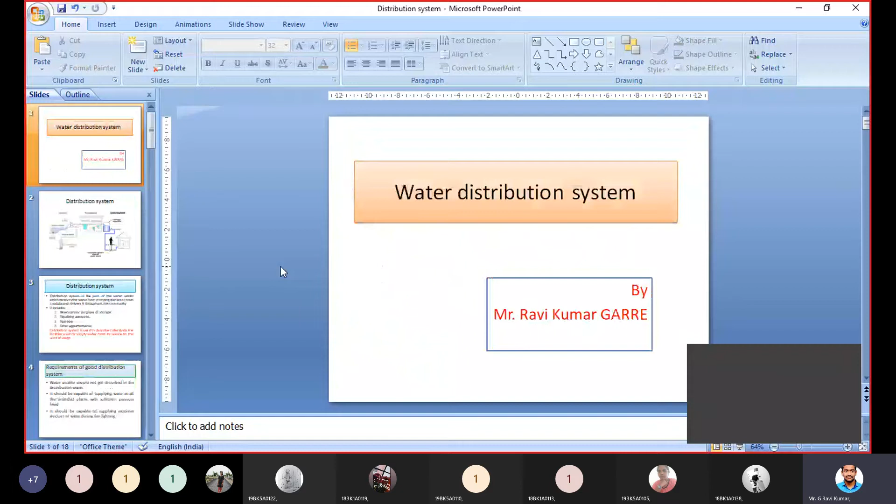In the previous class we were discussing about water distribution system, and we discussed different requirements of a good distribution system.

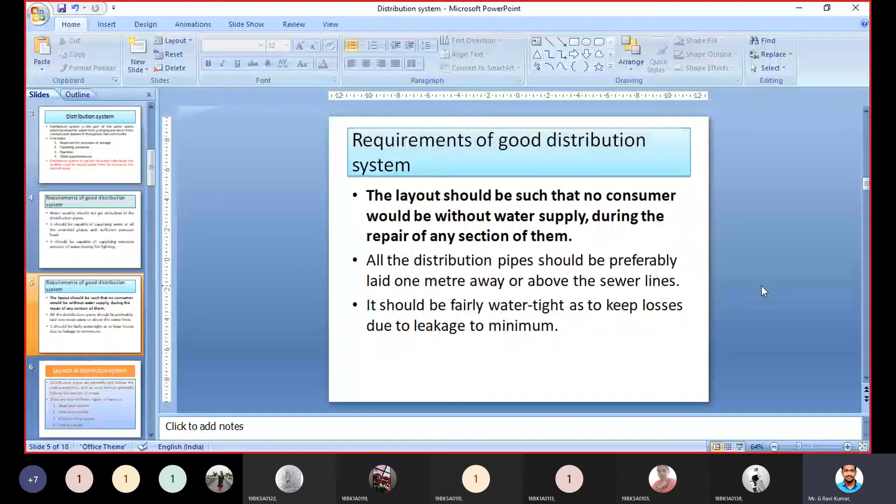if you take an area or a colony or a city or whatever it may be, the locality or the community, in that we have to lay the water distribution system like this.

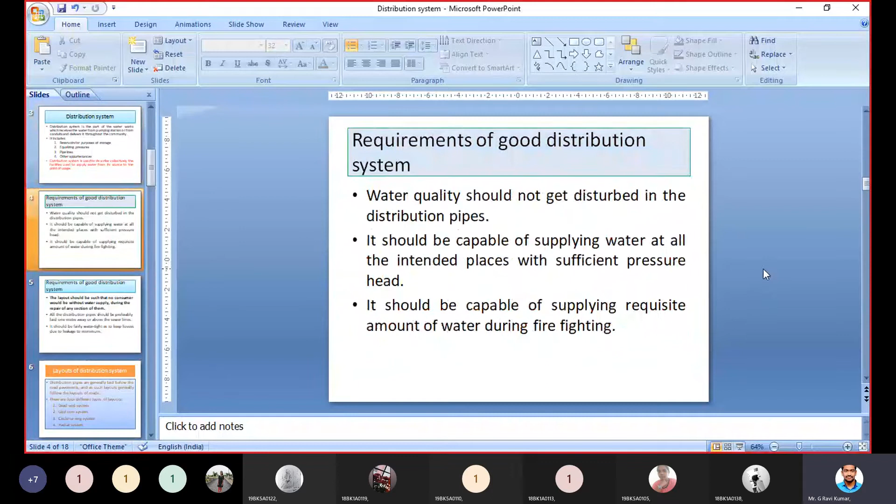One more thing we have to remember is that if we supply water through pipelines, then only it will be called a water distribution system. If we supply water through tankers, trains, or some other vehicles, it will never be called a water distribution system.

One more thing we can remember is that mostly if you take a colony, within that colony a number of streets will be there, a number of apartments will be there, and small gullies will be there. But how to have a layout of the pipelines,

that is the most important thing. If you take a colony, within that colony one main road will be there, and from that main road some streets will be split up, meaning some branch roads will be split up.

Within that, some small gullies and small roads or routes will be there, and different apartments, different houses, different offices, different types of commercial elements like schools, shops, hospitals will be there. Everywhere different zones will be there, different parks, gardens.

Everything will be there, so to each and everything, to each and everywhere, we have to lay the pipeline, and through that pipeline we have to supply the water. That is the important thing, how to lay the pipeline, that's the most important thing.

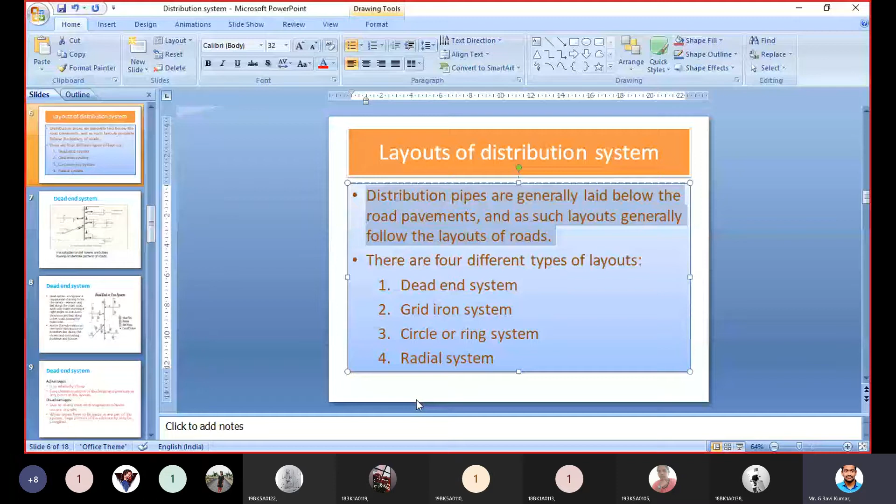The next thing is that there are 4 different types of layouts, depending upon the type of colony. If the locality is well planned and well designed and constructed, then the circle system or grid iron system will be good. But if the colony grew without planning, based on migration of people to that location, then the layout we provide will be called the dead end system. I have already shown the layouts of these different systems yesterday.

This is the most important question. There are 4 different types of layouts for water distribution system. The first one is the dead end system, next is the grid iron system, third is the circle system or ring system, and fourth is the radial system. These are the 4 types of layouts of water distribution system.

First, the dead end system. In this system, one main pipeline will be there - in any locality or colony, there will be one main road. So just below the main road we can lay a main pipeline, and different streets will be there. To each and every street we can have a branch pipeline. You can see the main pipeline is there, and different pipelines have been split up or diverged from the main pipeline.

You may call them streets or gullies, with different ends. From this main pipeline to each and every street and end of the colony, we can lay pipelines just under the roads and supply water. This kind of system is called the dead end system, and another name for it is the tree system.

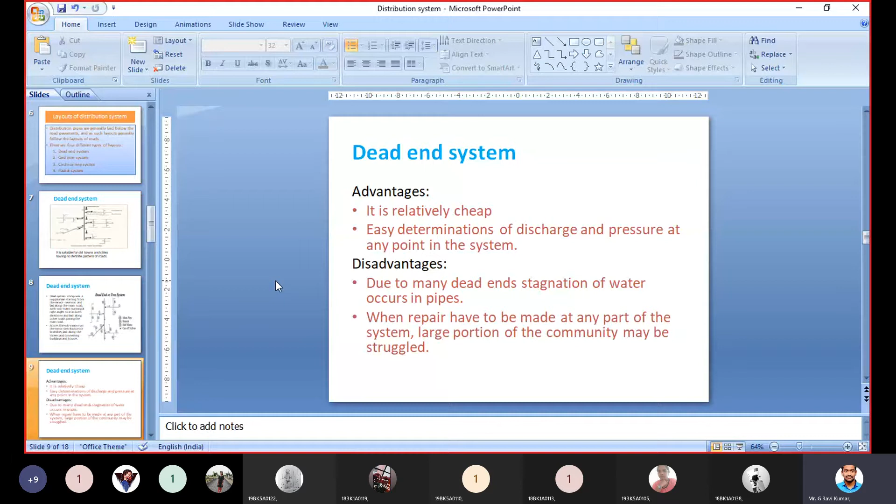Grid iron system means - you can see here, in dead end system, every branch pipe will start from the main pipeline, and at the end of the colony, or at some point, it should be ended.

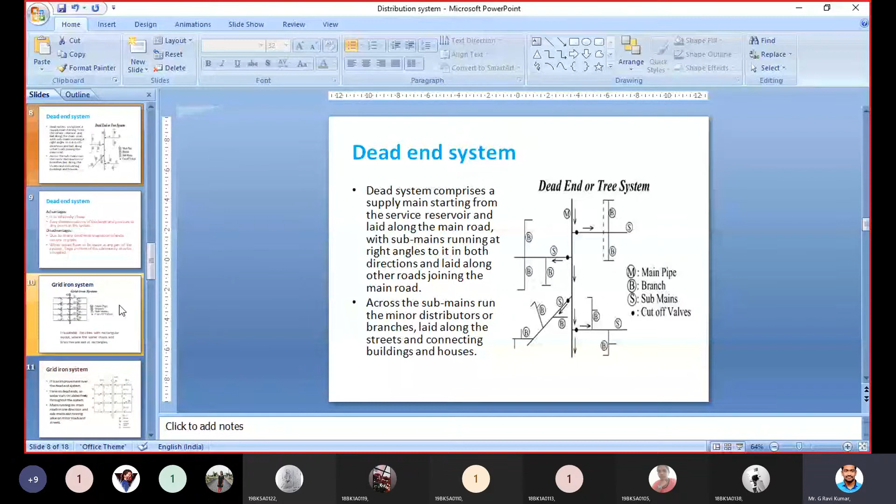But coming to grid iron system, in this system, the main pipeline will be there, and from the main pipeline the branch pipes will be started. But at the end of the branch pipeline, or at the end of the colony, the branch pipe should not end.

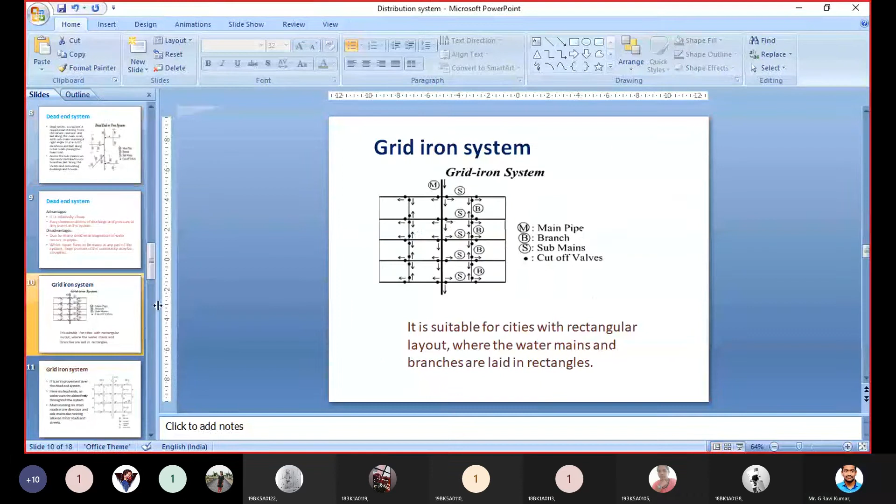It is suitable for cities or colonies or localities with rectangular layout, where the water mains and branches are laid in rectangles. In that case it is suitable. But even for other locations also, if it is possible, we can make it like that. So then this type of system will be called the grid iron system.

You can see here, main pipe is there, and branch pipes are there, and different valves are there. Every end of the branch pipe is connected to the end of its nearby branch pipeline. So in this case it is easy - if at any one particular point a repair operation is taking place.

In the previous case, it means in the dead end system, we can't supply water to either side of the point where repair is taking place. But in this system, if at any one particular point repair is taking place, for the remaining parts of the colony or remaining parts of the city, we can supply water from another direction.

If at the center or at the middle of the main pipeline some repair is taking place, then here we can supply water from the branch pipeline. From the other end of the branch pipeline, we can supply water to the remaining portion of the colony or remaining part of the city. So this is the advantage of the grid iron system.

It is an improvement over the dead end system. Here there are no dead ends, so water can circulate freely throughout the system. There are no ends, so water cannot be ended at a particular point. It can freely flow throughout the system, from one point to another point, and from one end to another end - we can allow water to flow.

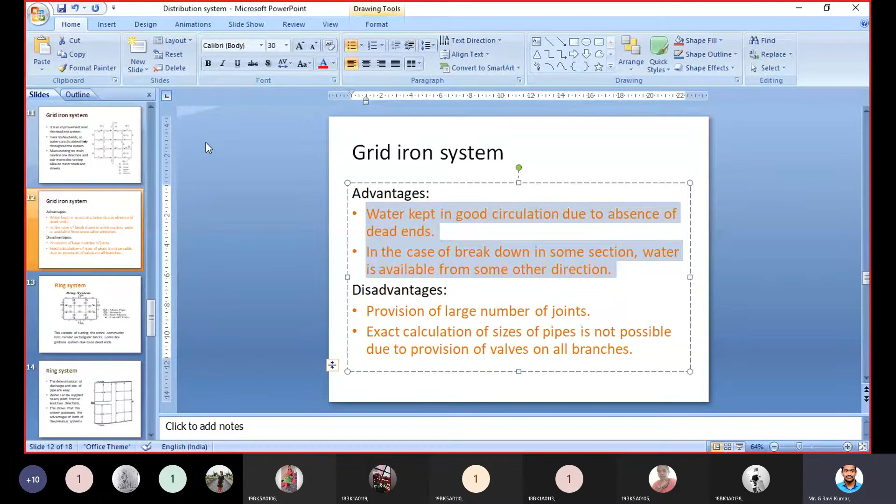It means exact sizes of the connecting pipes or branch pipes may not always be available. Here you can see ends of the branch pipes, so branch pipe sizes may vary. And the connecting pipe for the two ends of the branch pipe should be the same size. Otherwise, if its size is varying, the size of the connecting pipe may also vary.

So then what will happen? The water can't flow freely, and there is also a chance of obstruction for the flow of water. So the pressure head may fall, and the freeboard may not be available. The pressure within the fluid may fall, and the freeboard also may not be sufficient, causing obstruction for the flow of water. So that is the disadvantage.

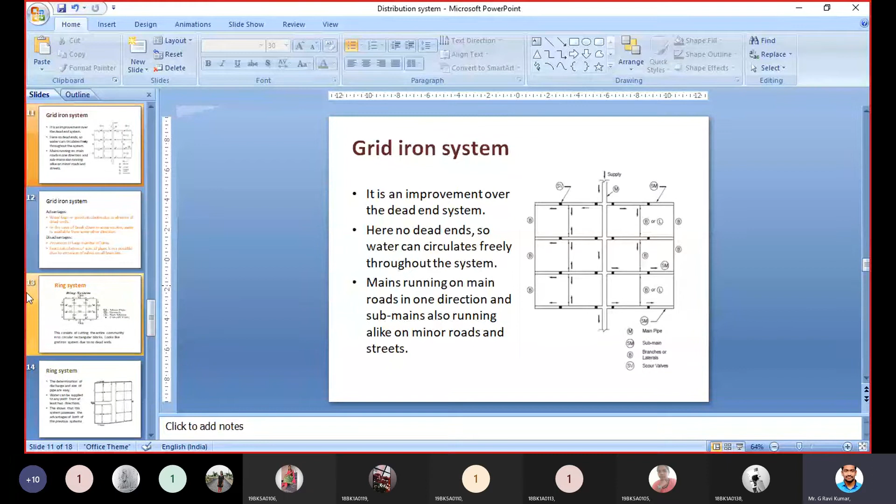Anyhow, compared to the dead end system, the gridiron system is advantageous. And the next one is the ring system.

This consists of cutting the entire community into circular or rectangular blocks. It looks like a gridiron system due to no dead ends, but it is not a gridiron system. It will be called a ring system, or a circular system. The main pipeline will not enter into the colony or the city; it will be outside of and around the colony. The branch pipes will be diverged from the main pipeline at different places, wherever the streets or roads are.

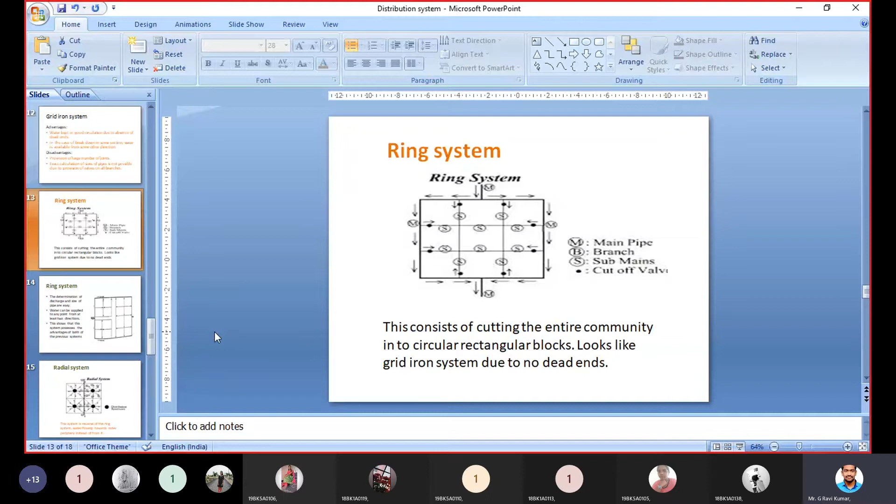There will be only one reservoir, only one water tank in case of the remaining other systems. But coming to the radial system, here the entire colony or entire area will be divided into a number of zones.

In this radial system, the entire colony or location is divided into a number of zones, and at the center of each zone an overhead tank or reservoir will be constructed. From that reservoir, pipelines are laid in all directions, so we can distribute water to each and every house. This type of system is called the radial system.

The system is reverse of the ring system, with water flowing towards the outer periphery instead of from it. In case of the ring system, from the outer periphery, it means from outside of the colony or city, the water flows inside.

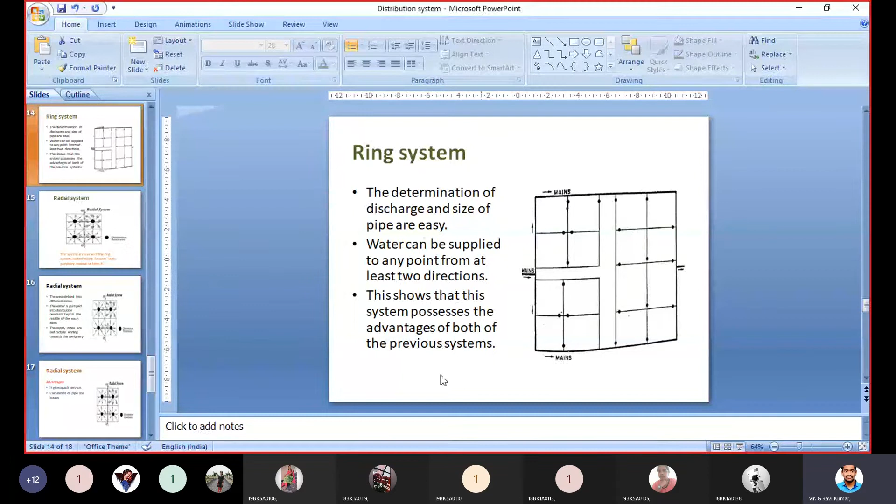But coming to the radial system, from the center point of the zone, the water flows to the end of the colony, to the end of the city. It means the system is reverse of the ring system, the water flowing towards outer periphery instead of from it.

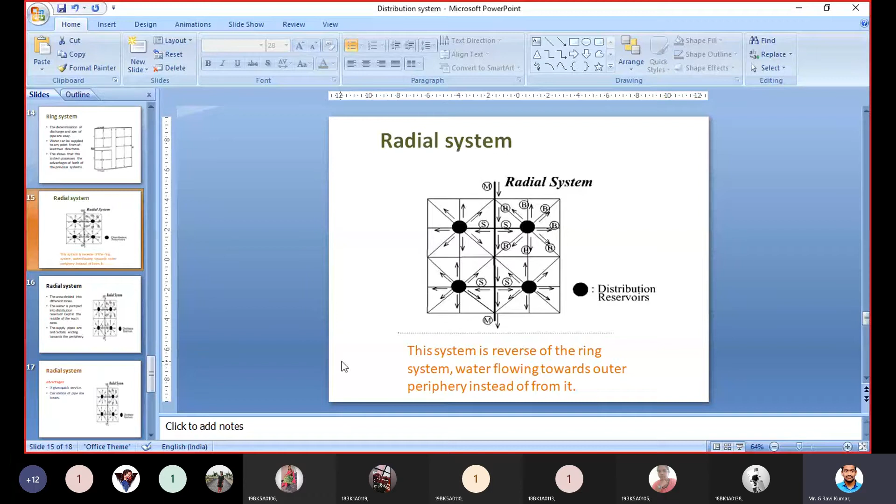This system is called the radial system. The area is divided into different zones in case of the radial system, and water is pumped into the distribution reservoir kept in the middle of each zone. Then from that reservoir, the pipelines will be laid, the supply pipes are laid radially ending towards the periphery.

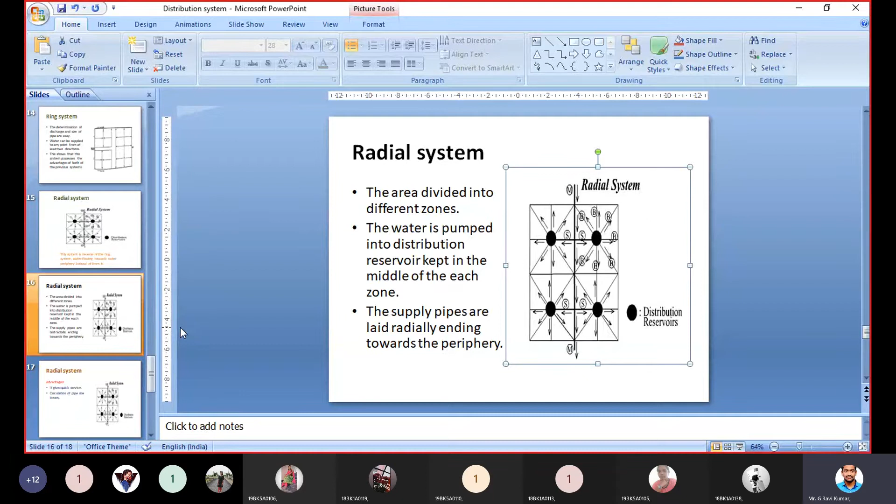The radial system has many advantages: quickly we can supply water to the public, and calculation of pipe size is also much easier here.

So these are the different types of water distribution systems: dead end system, gridiron system, circular system or ring system, and radial system. I think it is clear for you. If you have any doubts, you can ask me, guys.

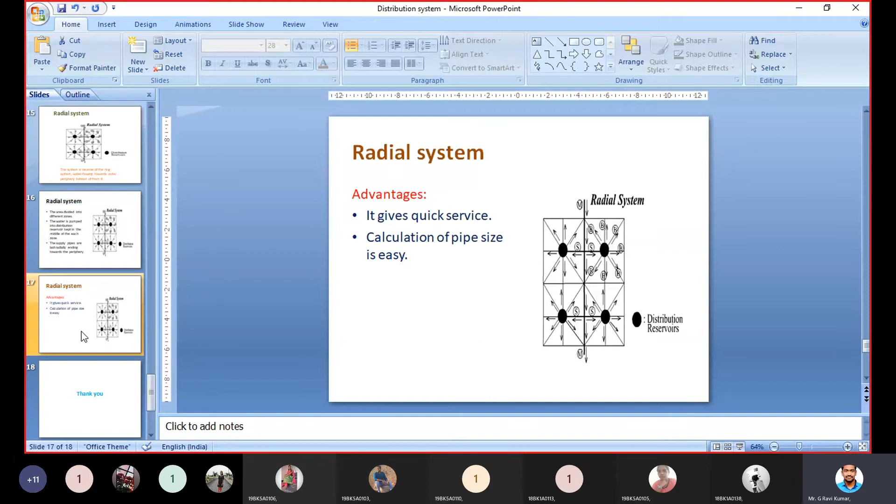Tell me, is it clear now for you? All the methods of water distribution system: dead end system, gridiron system, circle system or ring system, and radial system. Tell me if you have any doubts, you can tell me.

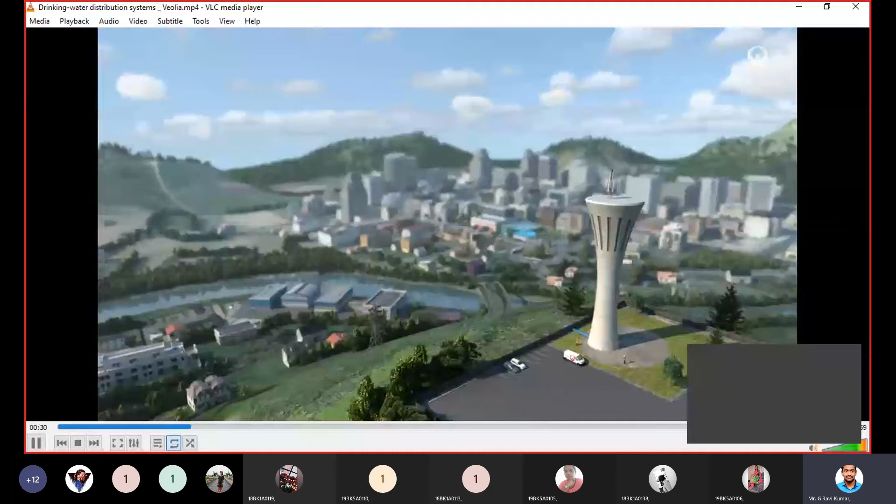Improving access to resources while preserving and replenishing those resources is what we do at Veolia.

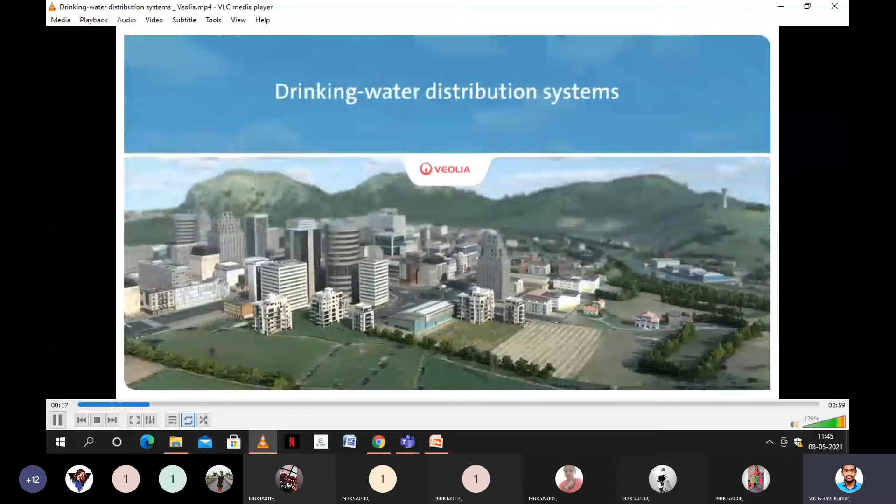Each day, our distribution systems deliver drinking water from treatment plants to our customers' taps. These systems are designed to provide an uninterrupted supply of drinking water on demand, compliant with regulations, in line with customer expectations, and with minimal environmental impact. Here's how and why at a glance.

The system is managed in small zones, which makes it easier to diagnose problems, do maintenance work, and accurately measure water distribution and consumption volumes. This is how we identify water losses. Leaks are found thanks to acoustic detection techniques or utilization of a tracer gas.

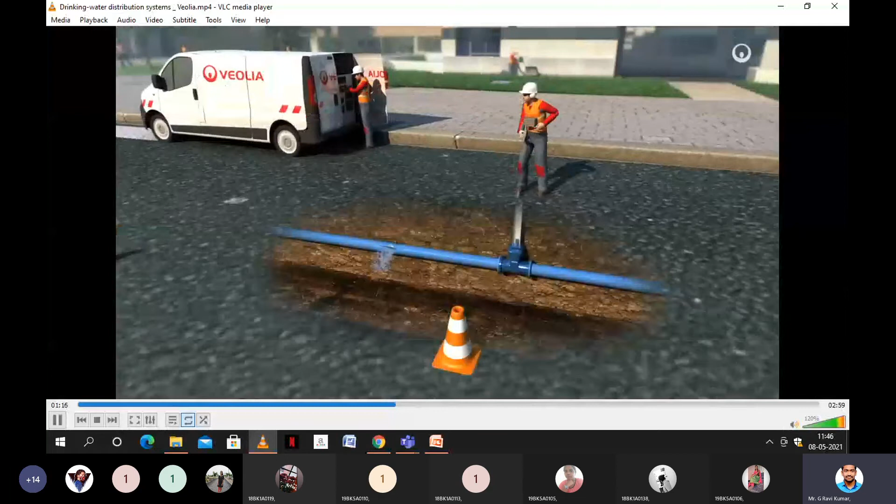At the base of buildings, pumping stations boost the water pressure so that it reaches every floor. We sample and analyze water throughout the network on a daily basis, making water one of the most closely monitored products made for human consumption.

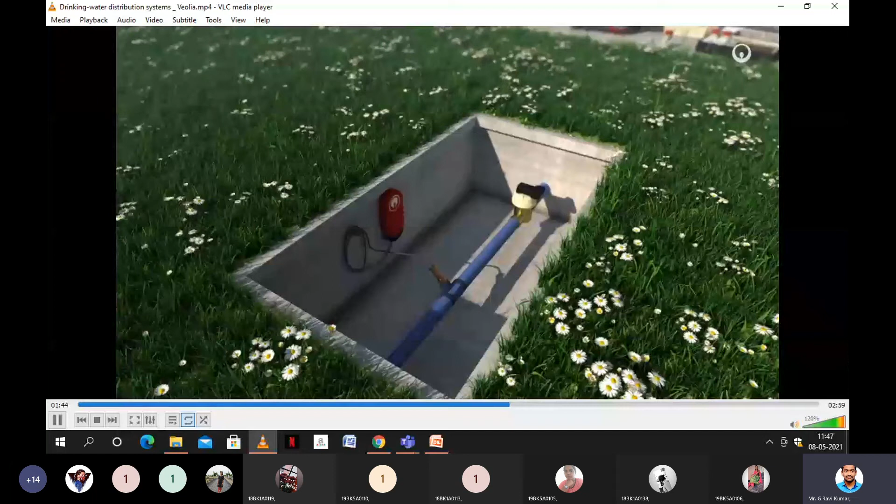Measuring instruments, sensors and probes are installed at key locations throughout the system. Meters measure water consumption at each household. In the network, other meters and instruments provide real-time readings on the flow rate, pressure, vibration levels, and water quality, and detect any leaks or changes in quality as soon as they occur.

These instruments transmit data via communication systems. This is what makes drinking water systems smart.

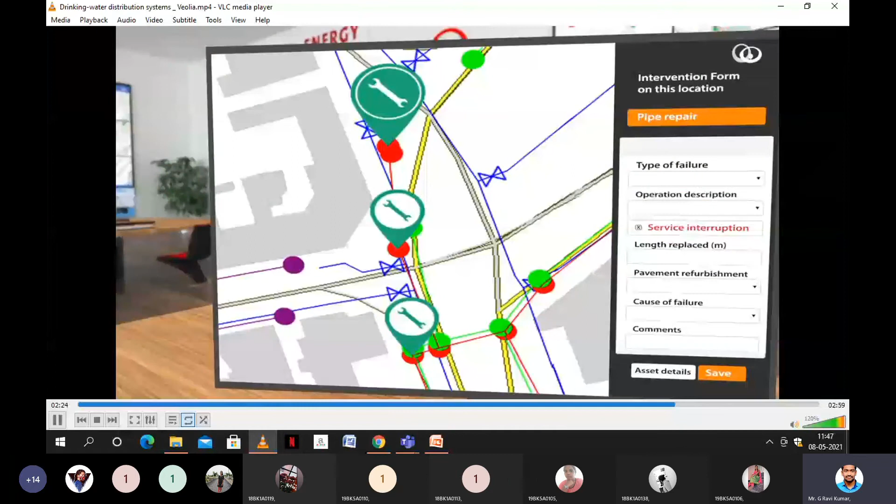All the data converges at a centralized control center. These control centers combine and analyze the data to provide insight about operations or events. This way, analysts have a global view of the network in real time. This is how they can monitor water quality, improve the operation and maintenance of the system, and respond rapidly and transparently, keeping authorities and consumers in the loop.

By ensuring a continuous supply of water while constantly optimizing our network's performance, our solutions are a long-term guarantee of operational efficiency for cities and for customers, the assurance of high-quality yet affordable water.

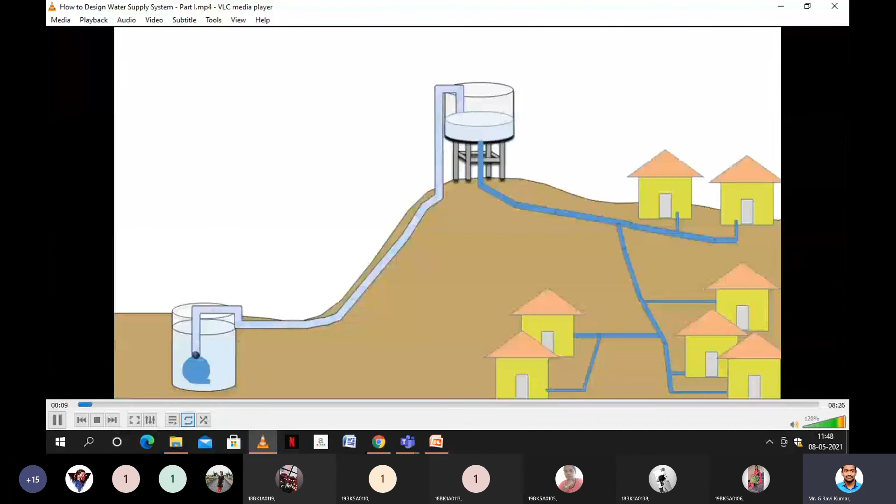In previous video, we learned about water supply system, and in this video, we are going to design that water supply system. So let's get started.

So in last video, we learned about 4 components of water supply system, which are shown here. The first one is source, second one is pumping machinery, third one is storage tank, and the fourth one distribution network. Later on, I told other 5th component, which was rising main.

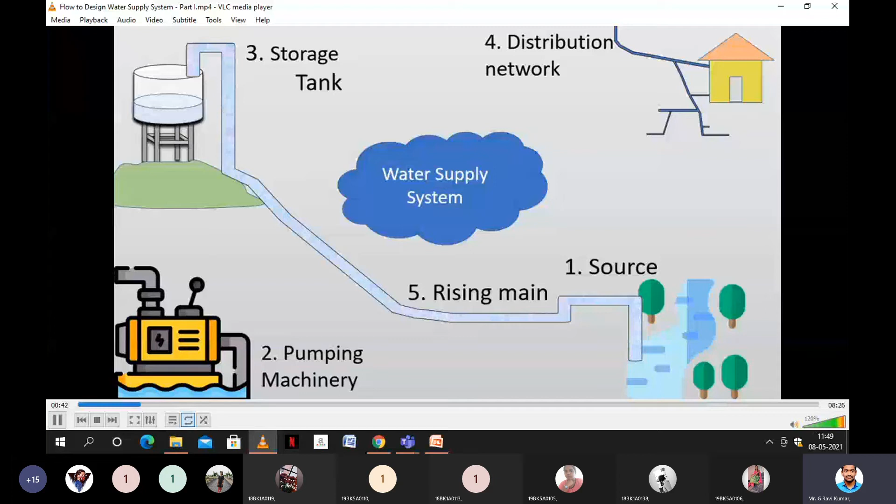We will learn about designing of these components one by one, and in next video, we will cover rising main and distribution network. But before that, we need to find out one parameter, which is most important parameter in designing of water supply system, and it is demand.

So what is demand and how to find that demand? Let's take previous village example. In that, there were some houses. Villagers needed water, and that village population of this year we don't have.

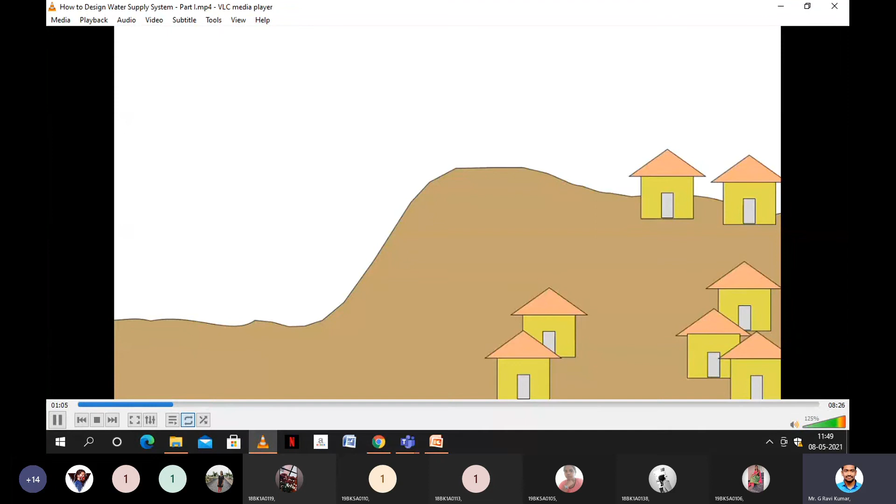To find out that, we will need previous year's census population. We can get previous year's population from census website. Let's say for the year 1991, 2001 and 2011, population of village were 1000, 2000 and 2500 respectively.

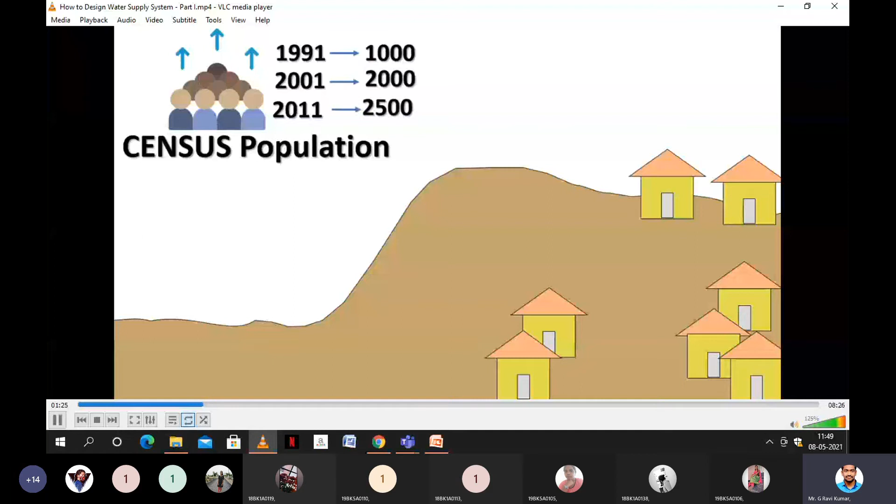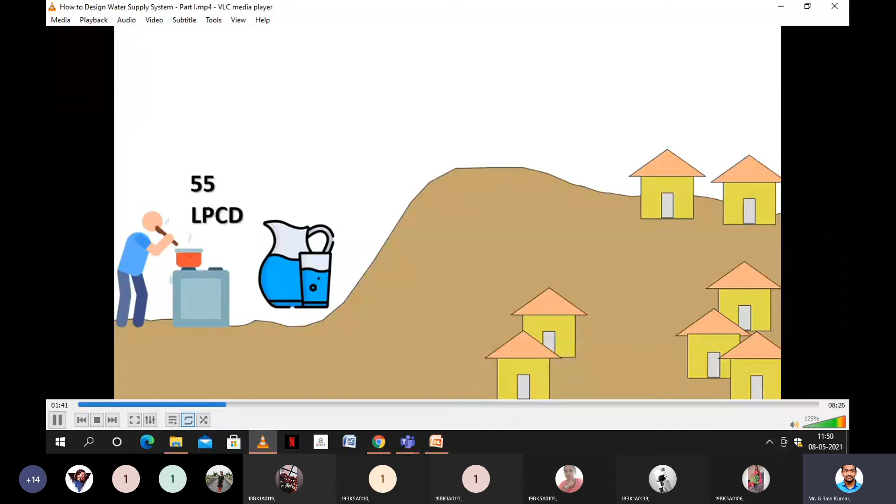Now, as every person needs water for activities like drinking, washing and cooking, we will assume here each person needs 55 liters of water in a day, and technically it is called 55 liters per capita per day, or 55 LPCD. You might be thinking why I have taken this random and odd number. The number I have taken is in reference to the new program of Indian government, that is Jal Jeevan Mission, which aims that every household should get tap connection and each person should get 55 LPCD.

So we will calculate how much water this village will need in a day. For that, we will multiply our population of year 2020 with 55 LPCD. So this is our demand.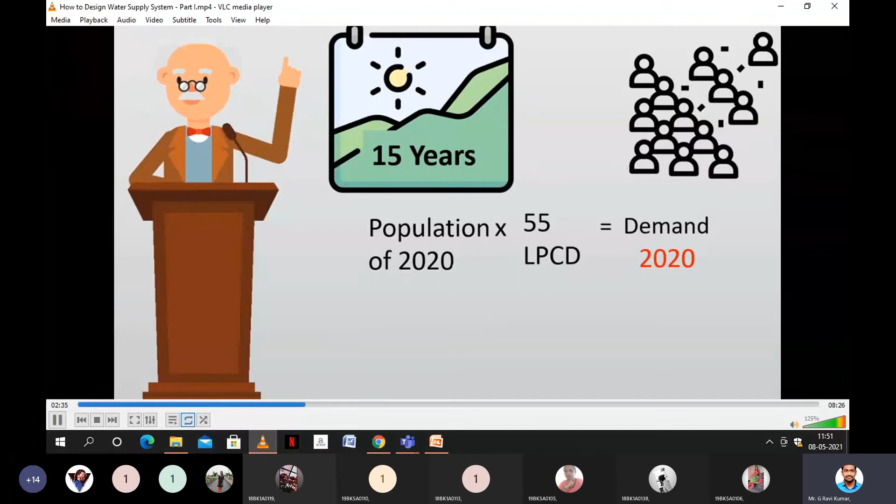But this demand we have got is for year 2020. But the scheme we are designing is for, let's say, 15 years. And after 15 years, our population won't be same as of today. So if we design scheme for today's demand, then we cannot get sufficient water after 15 years. So we need demand of year 2035, that is 15 years from now.

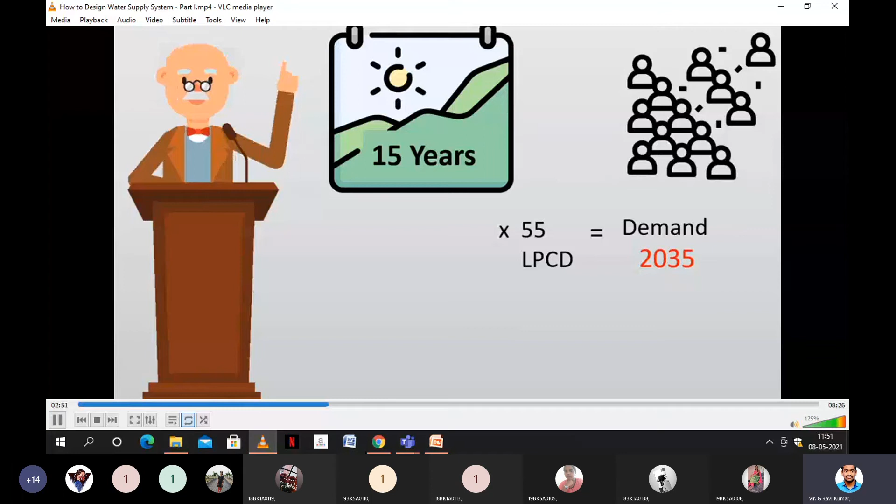So how to calculate 2035 demand? If we keep our demand per person same, then we need 2035 year's population, and it is found out by population forecasting methods. So how to do this population forecasting?

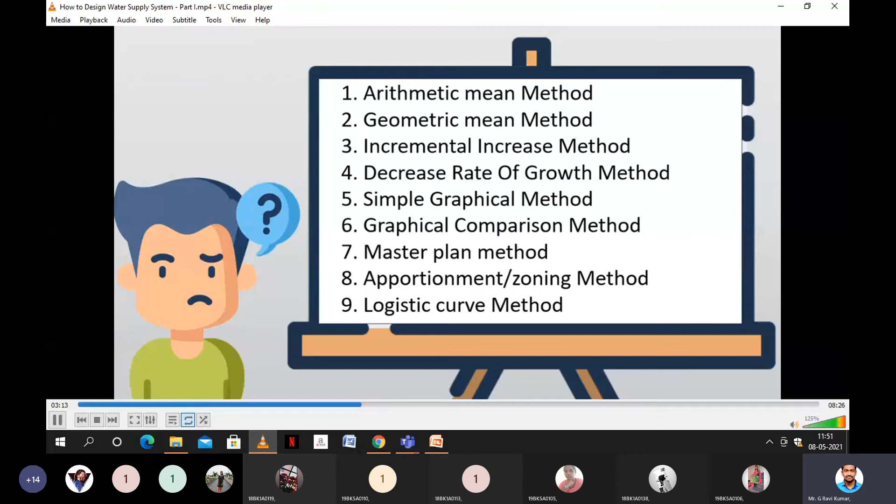There are many forecasting methods which you can see on the screen, and you can choose according to their use, which you can find in books. I have also attached a link from which you can decide. But we are going to choose three methods: arithmetic mean method, geometric mean method, and incremental increase method. Each method has its own significance, and formulas of these methods can be seen here.

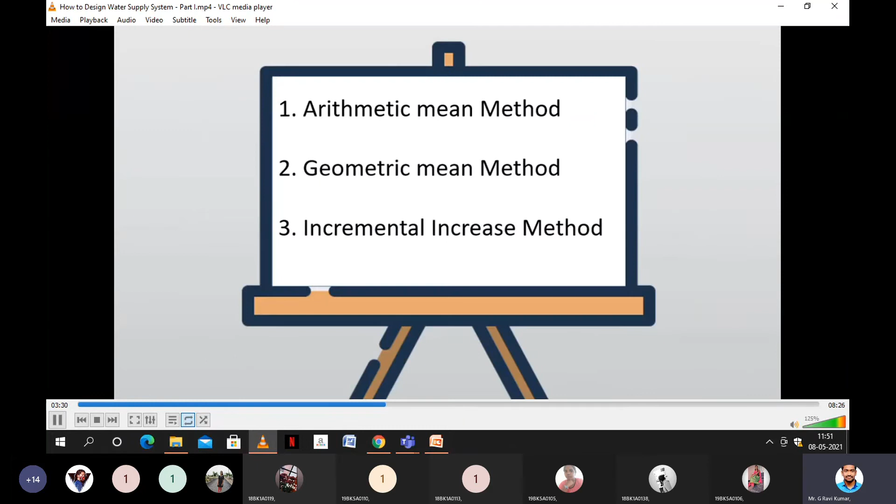By giving inputs like previous year census population, we will get forecasted population by each method. After that, we will take average of these populations. That's how we will get our final forecasted population.

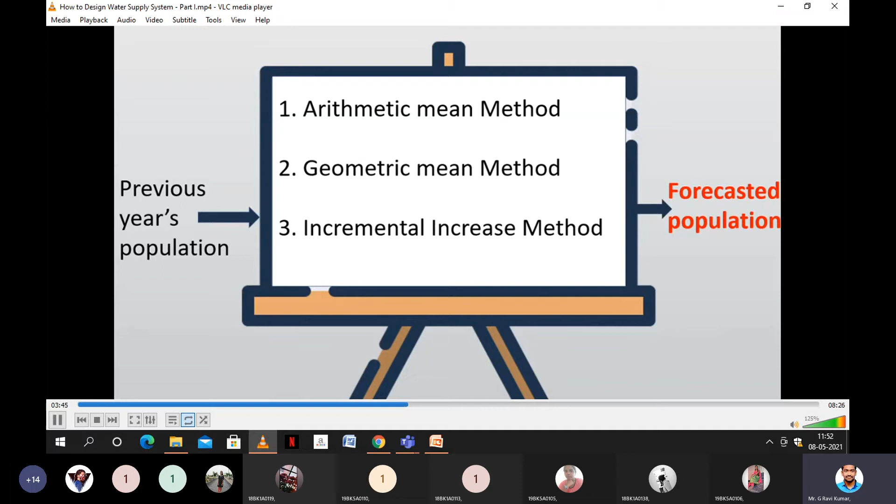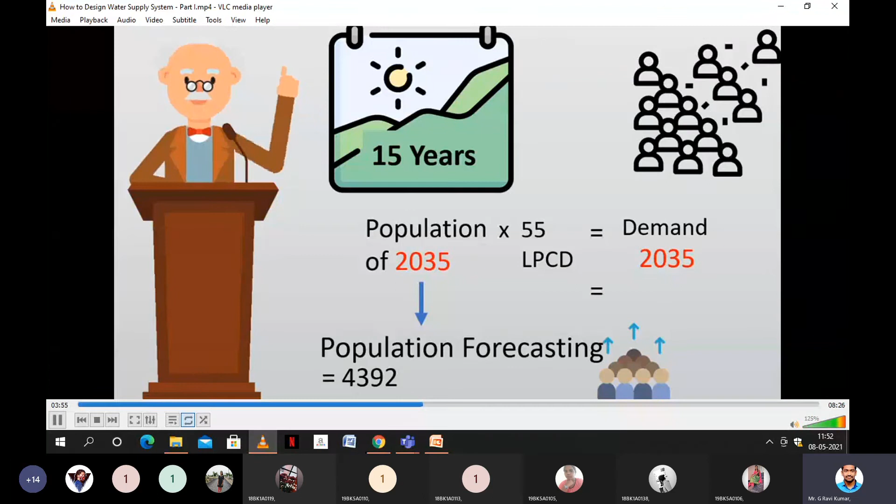After solving, we will get village population equal to 4,392. So we will get our demand also, 2,41,560 liters. By finding demand, we reach one milestone in our design.

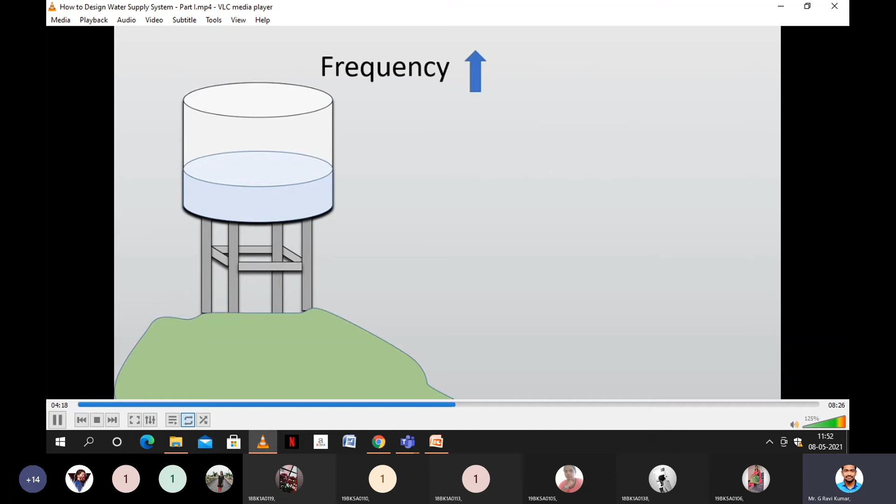Now we will find out volume of ESR. This ESR should fulfill demand of village for a day. If we change frequency of water filling in ESR, then ESR capacity can be designed for half or one third of demand. So it will reduce volume of ESR needed, and ESR cost will also reduce.

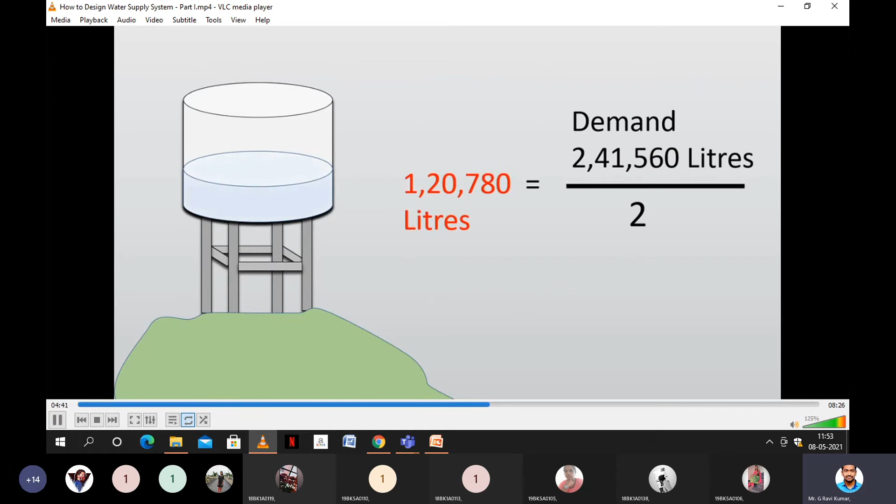If the demand is 2,41,560 liters and we assume filling of ESR 2 times in a day, then ESR volume will be 1,20,780 liters. As we found the ESR capacity, then what capacity of pump will be needed in terms of power?

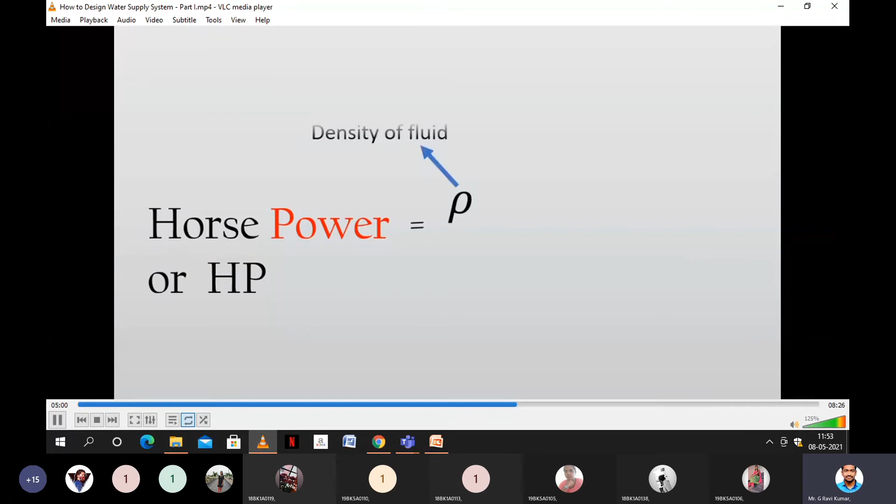The power of pump is defined in terms of horsepower or HP. So HP of pump is calculated by a simple formula: density of fluid into acceleration due to gravity into flow of fluid into total head of pump, divided by efficiency of pump. We will see how to find each term here.

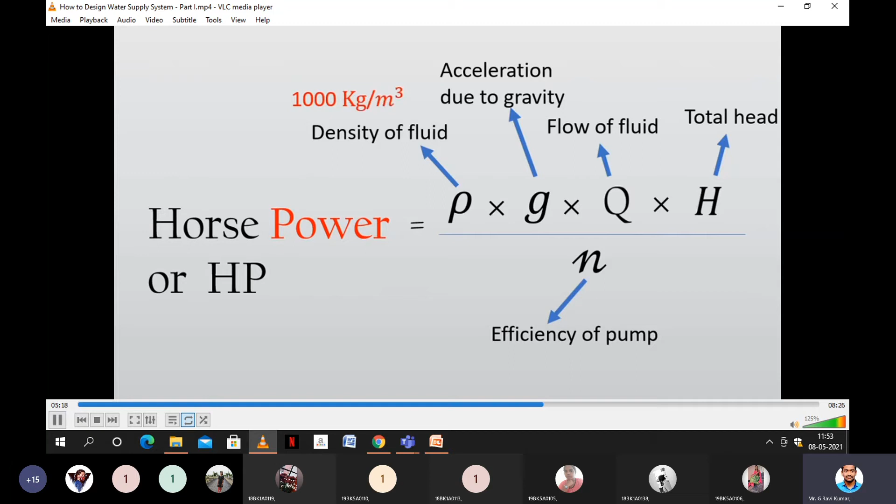As we know, density of fluid means density of water, which is 1000 kg per meter cube, and acceleration due to gravity is 9.81 meter per second square.

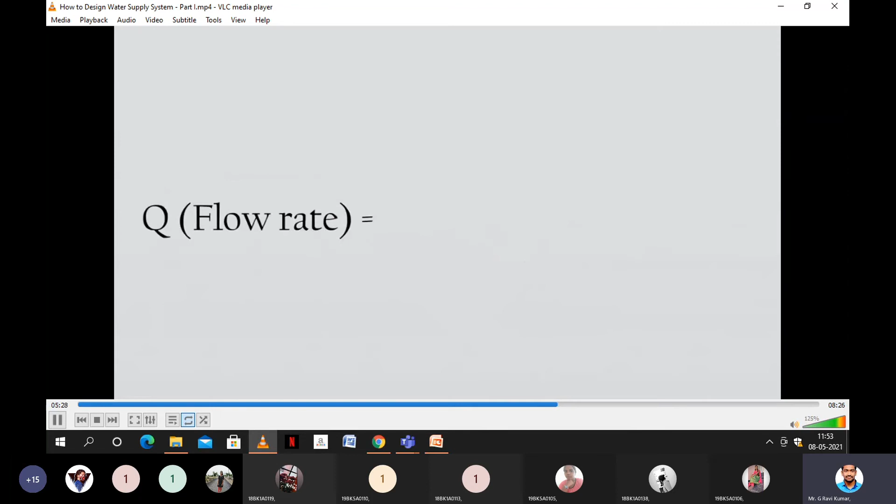For flow rate, as we know, it is equal to volume upon time. Volume is demand here, and our demand is 2,41,560 liters. Time normally means number of hours of water supply in a tank by pump.

Normally, if it is a solar pump, we will assume 8 hours of supply. To get demand in liters per second, we will take time in seconds. So after calculation, our flow rate will be 8.4 liters per second. If we accommodate 5% losses in this flow rate calculation, then flow rate will be 8.8 liters per second.

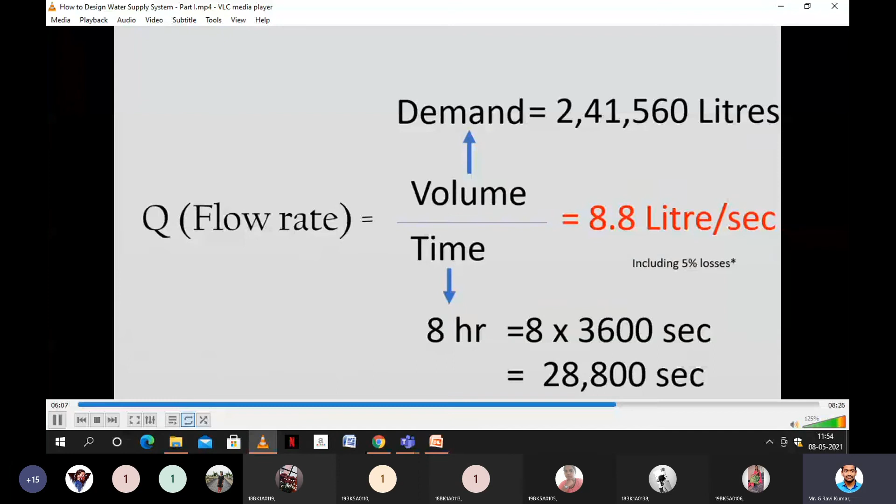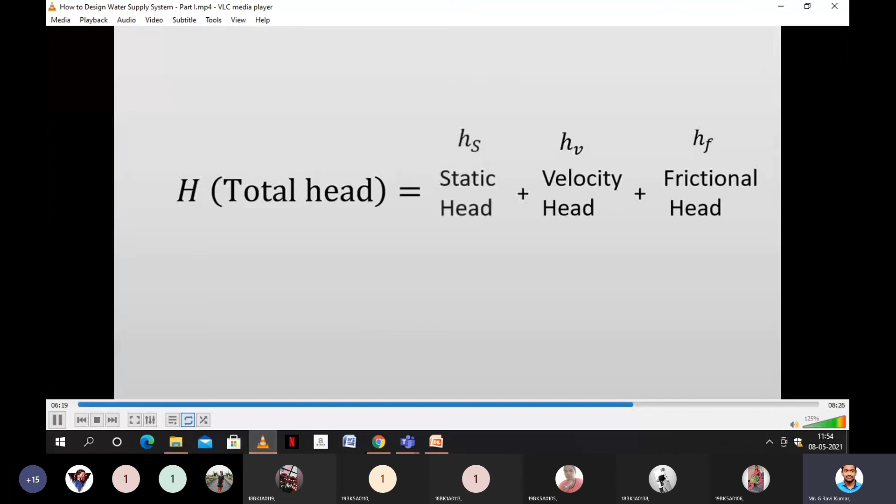Now we will discuss how to calculate total head. Total head is equal to static head plus velocity head plus friction head. Static head is elevation between suction pipe entry to delivery pipe end. Let's assume it is 20 meters here.

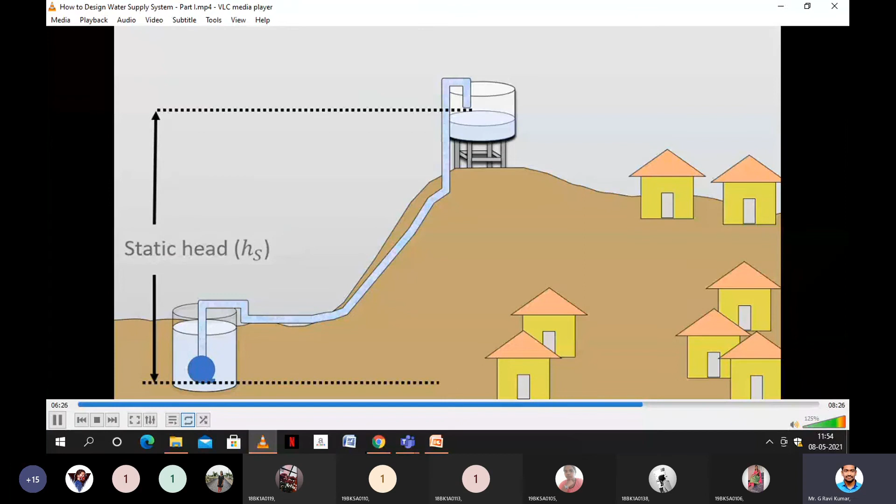Velocity head is v square upon 2g. Velocity v is given by flow rate upon area, and area is pi d square upon 4. Let's assume maximum velocity head as 2 meters, and friction head formula can be seen here.

C is Hazen-Williams constant. It is 140 for HDPE pipe and 100 for GI pipe. L and D are rising main length and inner diameter. Let's say in the village rising main length is 500 meters. Inner diameter is obtained from rising main design. Let's assume it is 75 mm, as we will design rising main in a later video.

So after considering 10% losses due to bends and valves, we will get friction head of 29.34 meters. So total head will be 51 meters.

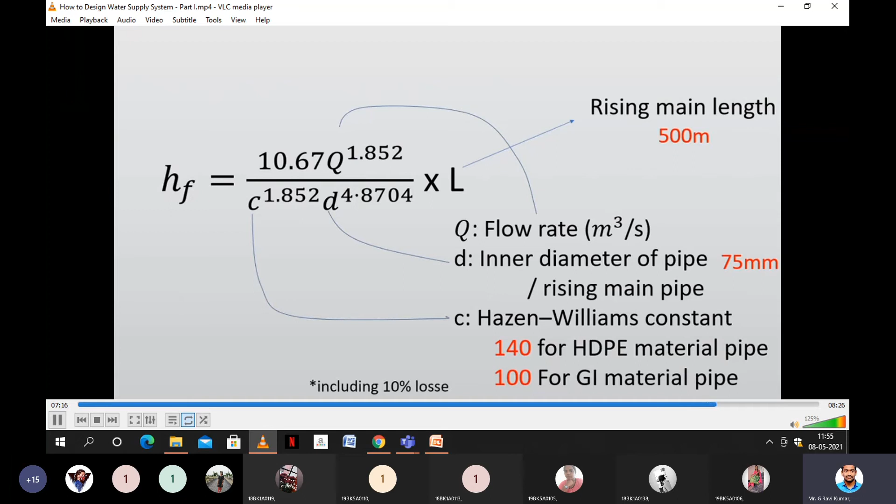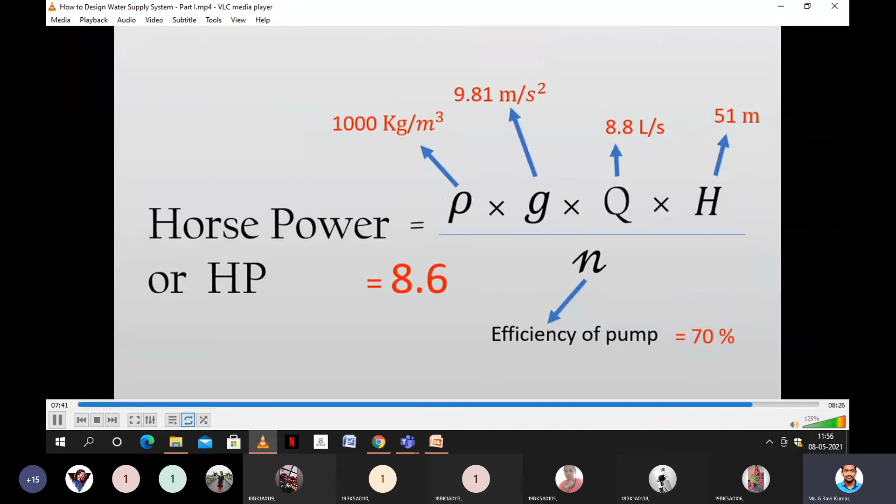Efficiency of pump can be taken from pump curve available at a seller. Here we will consider it is 70%. So HP of pump will be 8.6 HP. So we will use a pump which is available in market with HP close to 8.6 on the higher side.

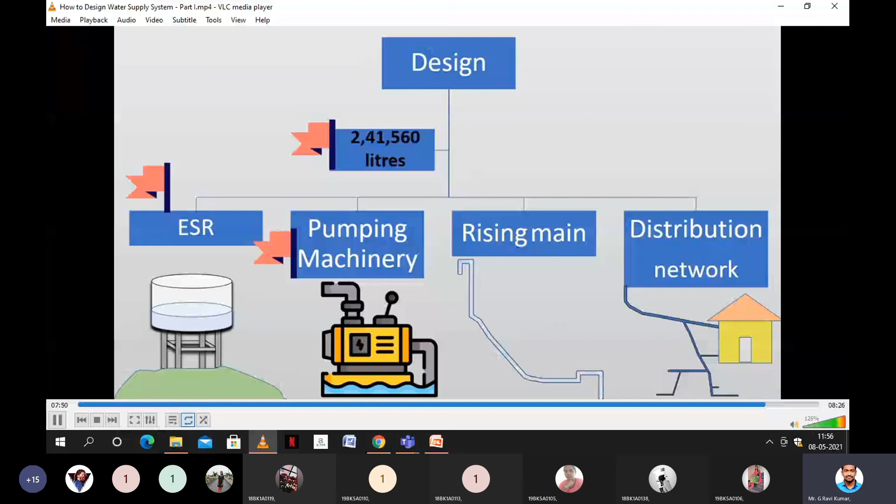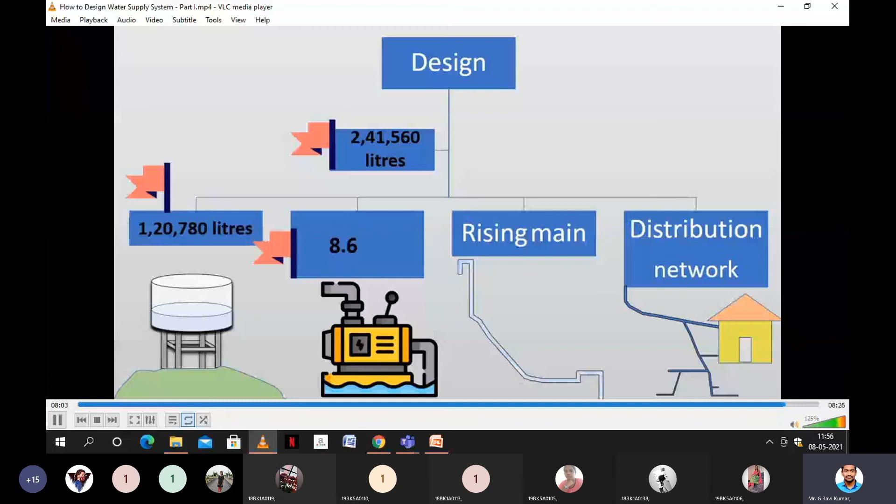Now we have found out demand, which is 2,41,560 liters, and from that we found out ESR capacity, which is 1,20,780 liters, and we found out pump capacity, which is 8.6 HP. The designing of rising main and distribution network we will see in part 2.